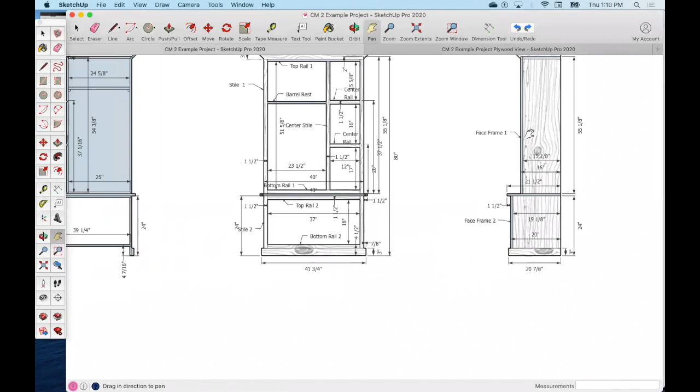We are going to start drawing our plywood view for our project plan. I have the project plans open in one document, and I'm going to draw in a second document so I can toggle back and forth. I made a copy of the same file and just added plywood view to the end. If you zoom out, everything is still drawn in here, I've just moved it over to the side for a fresh start. You could screenshot or do a variety of things to have your different views so you can see them.

For the plywood view, we're specifically going to need the side view and the back view to get started. So we're going to start by drawing the biggest pieces first, which is probably going to be your sides and your tops.

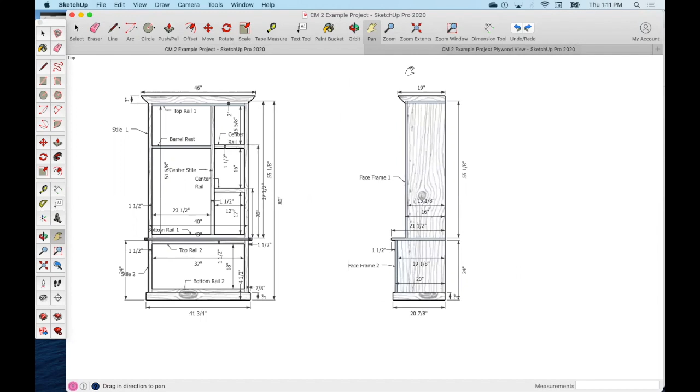If I zoom in for a closer look, I'm going to have two pieces at 24 inches by 19 1/8, and two pieces at 55 1/8 by 15 1/8. I'm going to lay those out first because those are probably some of my bigger pieces compared to our shelves and things like that.

So let's come back over here. I'm going to start by drawing a box that's 96 inches long, because that's the length of plywood, and 48 inches tall, 48 by 96. Now sometimes materials might come in a little oversized, like 96.5 or 48.5, but just for the purpose of laying this out, let's just draw a nice 48 by 96.

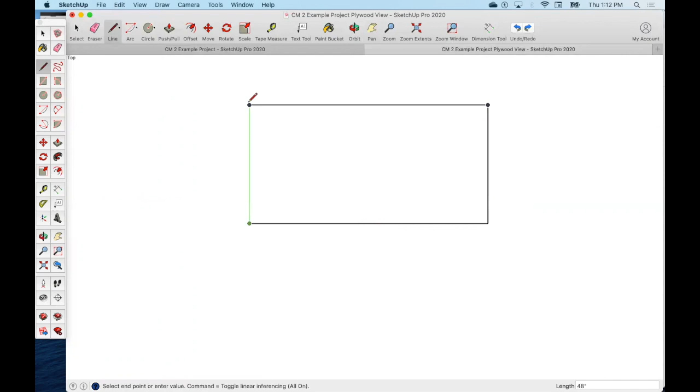You may want to dimension it so when you're looking at it, you can see how big everything is. You could dimension it afterwards as well.

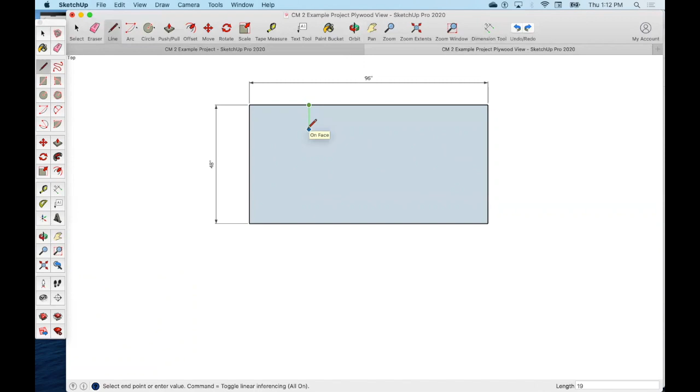So I'm going to start in the corner here, right on the edge, and come up 24 inches by 19 1/8 -- so I'll come up 24, and 19.125. Remember when you're typing in your numbers, you can see that size down here on the bottom, so make sure you get your pieces all nice and even.

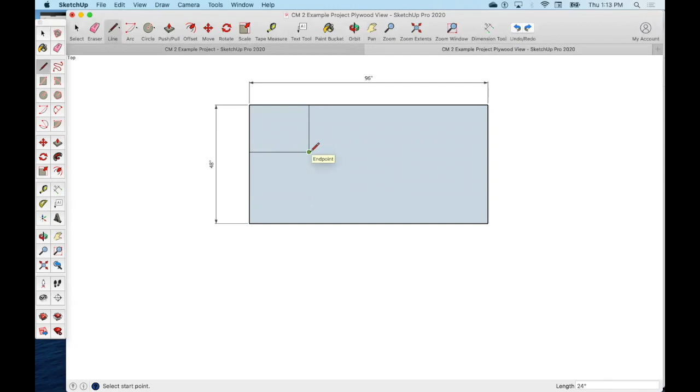Now, instead of like cabinet making one where we just drew our pieces right next to each other with a little waste space at the end, because we're going to cut this out on the CNC router this year for cabinet making 2, we're going to leave a 1/4 inch in between each one. So it might be a little more work laying this out.

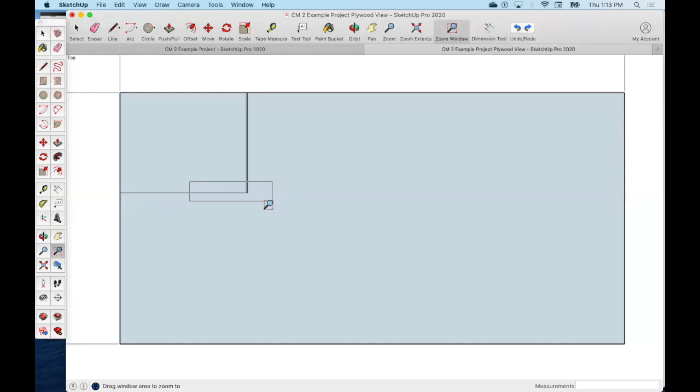We're going to come up 0.25, and then from that line I'm going to come over to the edge. Now I'm going to zoom in here and delete this line -- this is just some spacing, so when I bring it into the CNC router my pieces aren't locked together, and this leaves room for the bit to go around the outside of the pieces.

So now I'm going to come up my 24 and back over -- there's my two bottom sides. Let's take a look at the top, which was 55 1/8 by 15 1/8.

I'm going to come over a 1/4 inch again, 0.25, and find that line, and come up 55 and 1/8. So I'll take my pencil on that second node and come up 55.125, then bring that over 15 and 1 divided by 8, enter, and draw that back down. So this is my top piece, my top side.

Let's see what we have also for spacing over here. I don't know that we're going to have quite enough spacing for the other piece, so we could lay this out a little different rather than putting these two on top of each other, because that's going to leave us limited space up top -- we're not going to really have enough room for everything else.

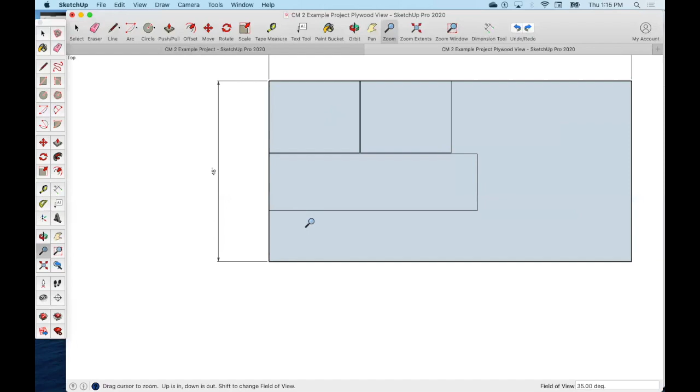Maybe we put these two right next to each other. That's all really going to depend on how you want to draw this, but we're trying to make it as efficient as possible.

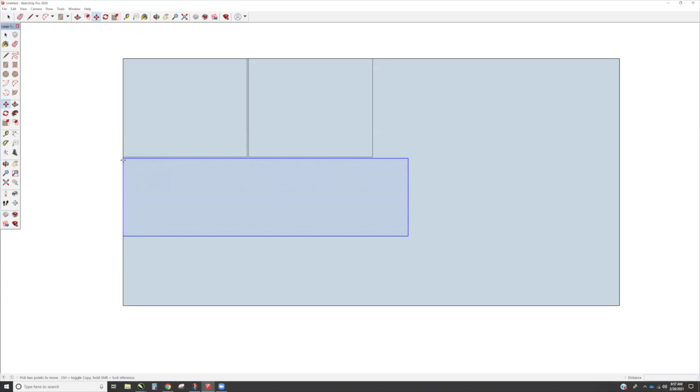So I've got this whole thing turned blue, and I'm going to move this. My lines aren't touching each other, so when I move this, I'm going to start moving it. On a Mac, you're going to hit Option. On a PC, if I have that highlighted and use the 4-arrow move tool, I'm going to grab it and start to move it and hit Control, and Control will make a copy and release it so I can move it to where I want.

That way I have my size correct, and then I can come over here and erase this line and this line and this line. I don't need those. So maybe when I do this one again, let's zoom in a little bit so we can get some better control.

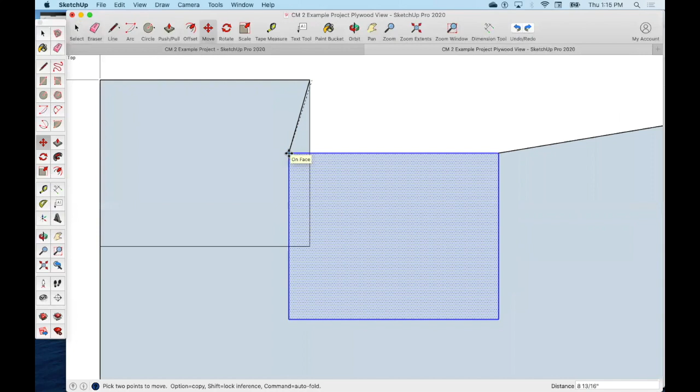When I do this one, I've got this blue, and I'm going to grab the 4-arrow move tool. I'm going to pick this corner, hold Option, and come down here, hopefully to that second node. Is it going to be there, that 1/4 inch? I'm not seeing it, so I might have to come down a 1/4 inch first. So I'm going to come down 0.25, and now I have that second node.

Now I'm going to use my move tool and the Option button to release that. That's what I'm going to do instead, and then come in here and erase this. Now I'm going to use that line, that 1/4 inch, as my bottom for my next piece. Let's see if it didn't snap either. So let's go up 0.25, and now I have that node.

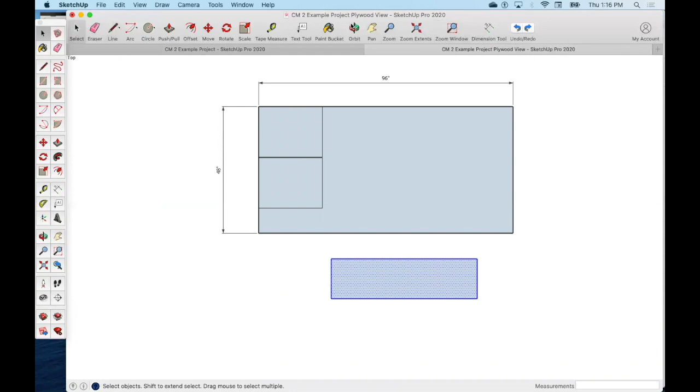So now I'm going to come back in here and move this piece. If I double click it or triple click it, I can grab the 4-arrow move tool. I'm going to move it up to that first node, so there should be 2 nodes there. I should now have that 1/4 inch still drawn in there. It's there.

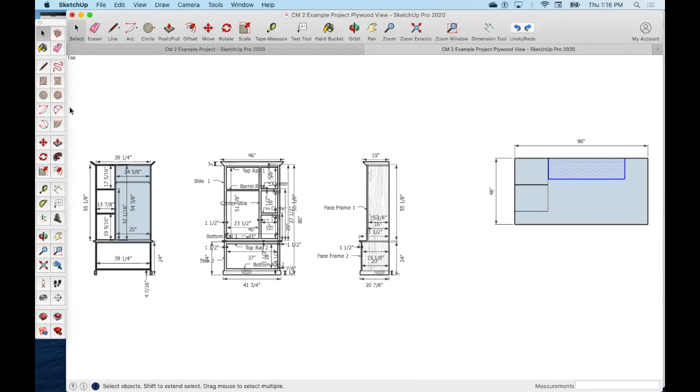Actually, for the convenience of hitting zoom extent, I don't want to see this all the time, so I'm just going to draw my plywood so that every time I hit zoom extent, it shows me my plywood when I zoom into something. You're welcome to leave that. Again, I have my original over here - I have not messed with that.

What I'm going to do now is I need 2 of these, one for each side. So I could copy and paste, or I could use that move tool again. I'm going to take my pencil tool, come right here, and come down 0.25 again. That way it gives me a little bit of clearance for when I bring it over.

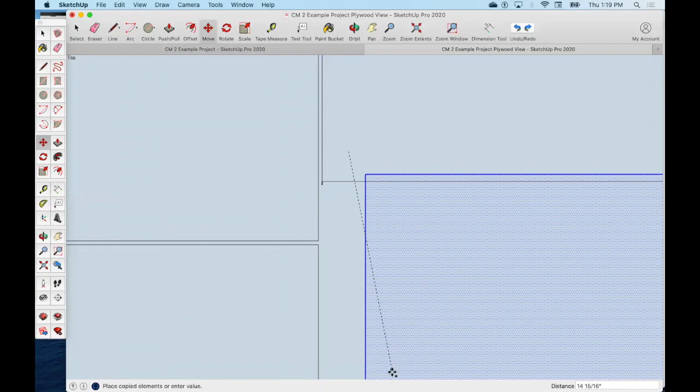I'm going to triple click this and start to move it from this corner here, and hit the Option button again - Option works on the Mac. I don't know that got stuck where I wanted it to, so I'm going to undo that. I'm going to grab this again, move it, and Option. Make sure I don't overlap that. That's good, and take that node to that line right there.

Okay, we will have to come back eventually and delete these little lines that I drew for my 1/4 inch reference. It's up to you if you want to do it now or later - not a big deal. So now by moving these down here, I have room for a 3rd piece up here.

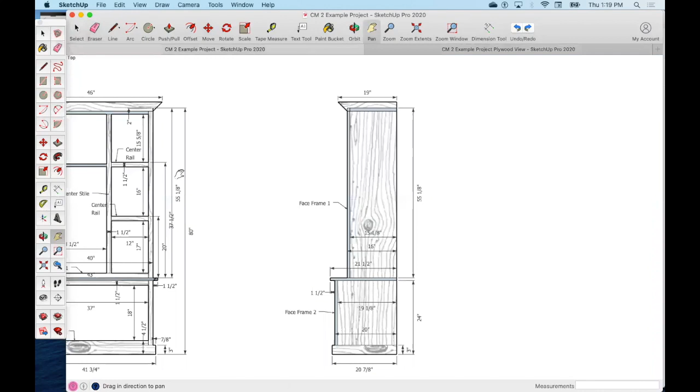I'm going to need that 3rd piece right here where this divider is. That's going to be the same depth as this, 15 1/8. Actually, it'd be 3/4 of an inch less, because the backing is going to slide into here, and this middle piece is in the middle - it needs to be 3/4 of an inch shorter. So it would be 54 3/8 by 14 3/8.

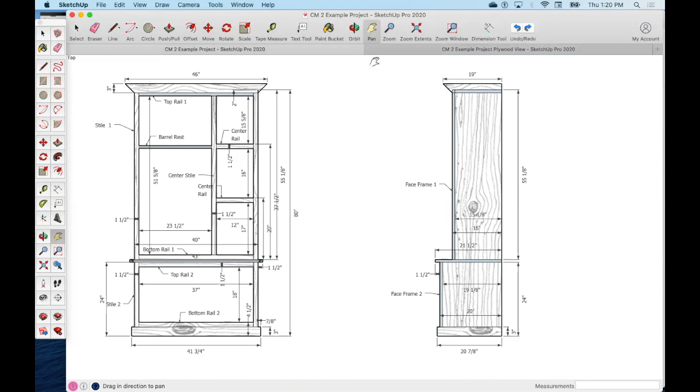So we're going to come back over here, and that was 14 3/8 by 54 3/8. So let's start drawing that one, and I'm going to come over a 1/4 inch.

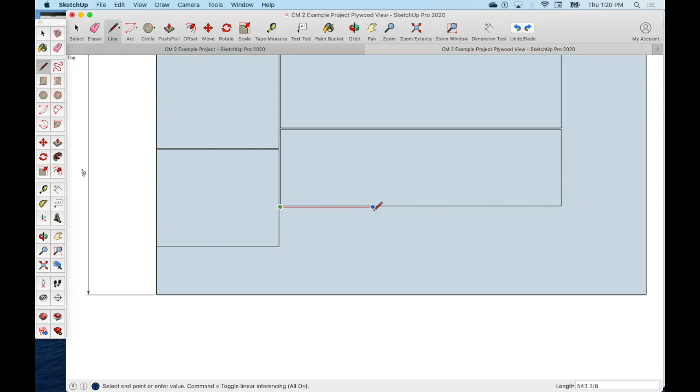Let me zoom in a little bit here so I can make sure I'm starting on the right point. That was 54 and 3/8 - well, I got way too many numbers in there. 54 space 3 divided by 8. And then I'm going to come down 14 space 3 divided by 8. And now I can complete that, 54 and 3/8, and draw that over.

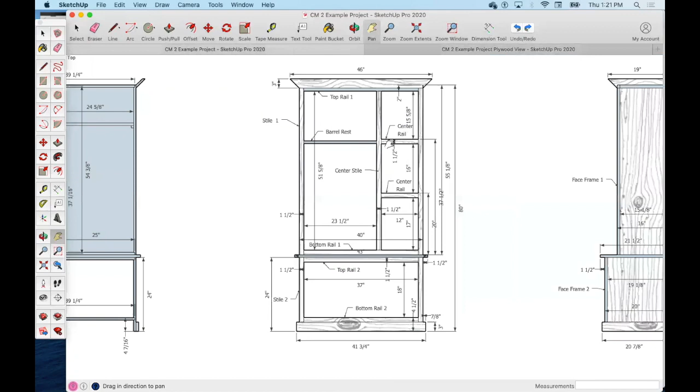So I have my 2 outside and my middle divider. Let's see how much material we have left here. We've got about 15 inches, and I don't think that's going to be enough for what we want to do with any of our other pieces. We might be able to use that for our 2 shelves, but let's move on. We're not going to be able to use any of the other bigger pieces.

So if we take a look at these, again, they're going to be 3/4 of an inch shorter. So that was 14 3/8 by 13 7/8. So the grain length is going to be the 13 7/8. And so we're going to come here.

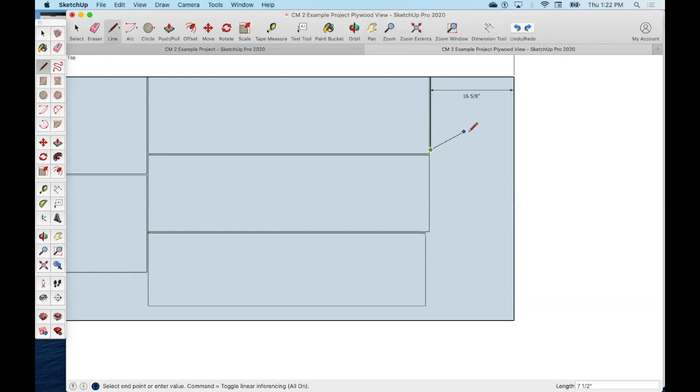I need a 1/4 inch, 0.25. I'm going to come down 14 space 3 divided by 8. And I'm going to come back up - what was it? 13 7/8. So come back up 13.875 and connect that over. So this is going to be one of my shelves.

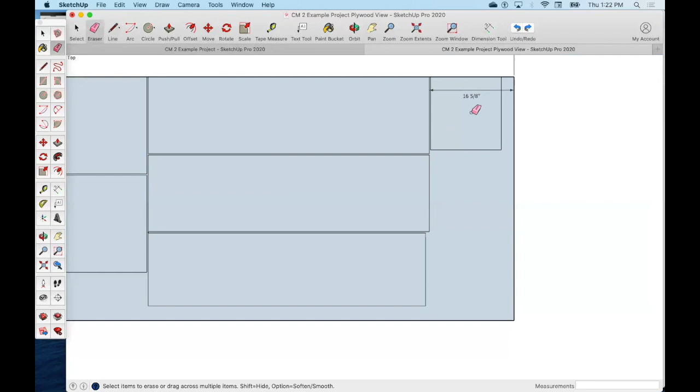And I can delete this dimension because it's really not meaning anything to us right now. And I need 2 of these. So what I can do is I can double click that again and use the 4 arrow move tool. And as you move, you can hit the option on a Mac and move that down.

Now, because we're not using a table saw to cut out our pieces, we can have these joints staggered because the router will just go and make the corners and everything will be nice and complete. We don't have to worry about these lining up exactly. So as long as we have that 1/4 inch gap in there, at least a 1/4 inch minimum, then we'll be good. So I've got those 2 pieces in there.

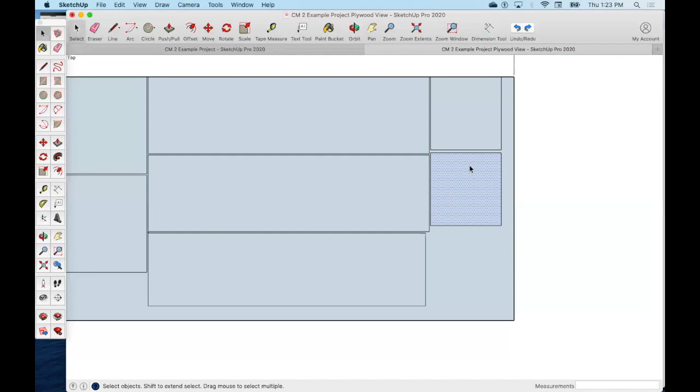I'm going to need another sheet. So I'm going to just come up here a little bit and I'm going to draw my second sheet at 48 by 96. And if I hover over this dot and drag it up, I haven't clicked - you can see I'm on a green line there. And if I click now that I have that green line, it means I'm lined up with that node.

And I can have my 2 sheets lined up. If that is a concern for you, it might just make things easier when you're zooming in and out. And I'm going to come up 48, and I needed to connect those 2. So this is going to be my sheet, second sheet - sheet 1 or sheet 2, however you want to label them or distinguish them apart.

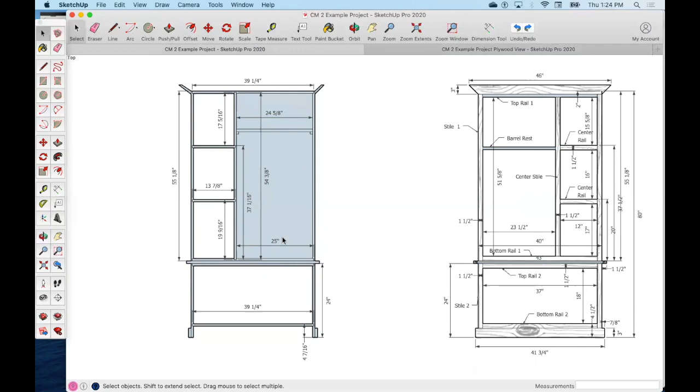So now what I need is a top, a bottom of the top, I need a top of the bottom, and I need a bottom of the bottom. So they're going to be different sizes, but the lengths are all going to be the same. That 39 1/4 is how long they are. So 39 1/4 by 2 of them at 19 1/8, and then that 39 1/4 by 2 of them at 15 1/8.

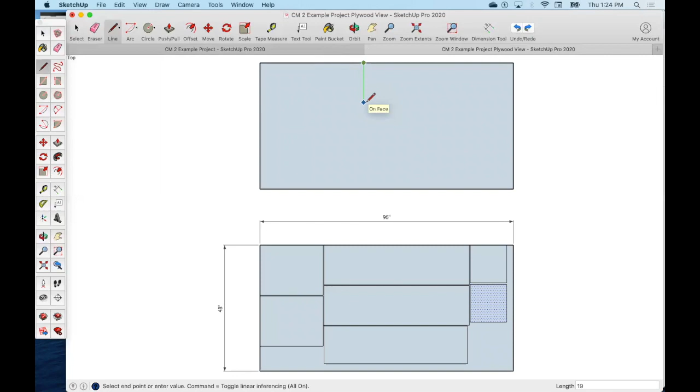So I'm going to start with my big ones again. My biggest ones would be the bottom. They're 39 1/4. And I find the end point and I'm going to come down 19 1/8 and draw that back. So there's one of them.

And then I'm going to come up from this corner, 19.125. And I'm going to draw this over 39 1/4.

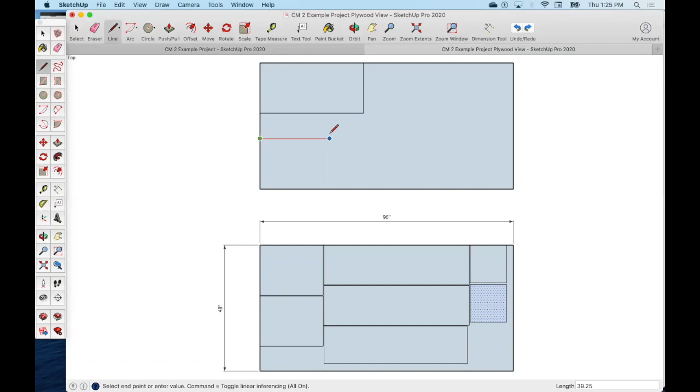So there's my 2 pieces for my bottom piece. That is for this cabinet down here, the shelf and the top of this cabinet down here. Now I need 2 more, one for up here and one for down here, again 39 and 39 1/4 by 15 1/8.

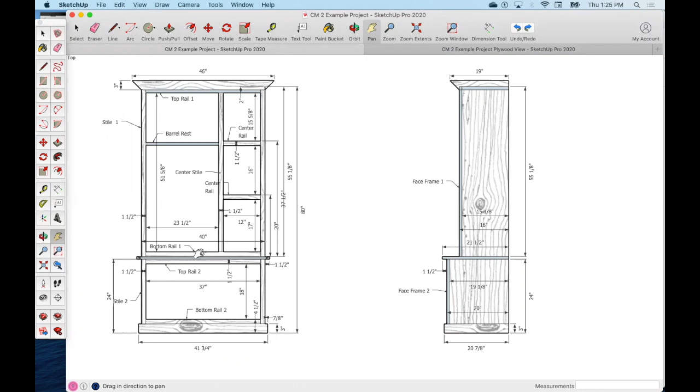Let's make sure we're leaving that 1/4 inch groove for the router. I'm going to come up 0.25, find that node, and come down 15 and 0.125, 15 1/8, and that was 39.25, 39 1/4. I'm going to come back.

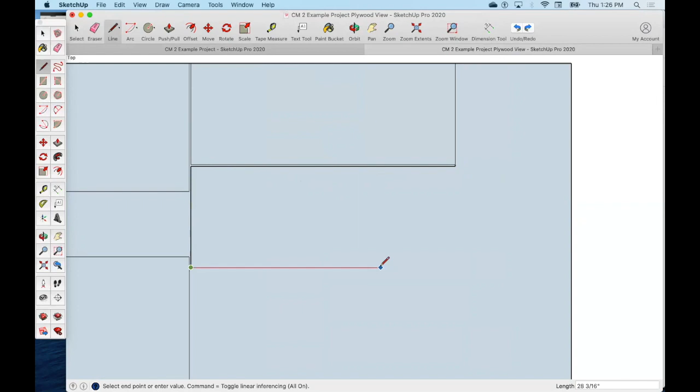I'm going to come over again 1/8 or 1/4 to give myself some room for the router. And then that doesn't look right. There we go. And then from that point I'm going to come back down 39.25 and over 15.125, and I've got to connect the dots, 39 1/4.

And there. So I'm going to zoom in and erase this little connecting line that gave me my 1/4 inch groove or depth between there. So there are my 2 pieces.

I put my scrap here in the middle. That way I didn't have to come over a 1/4 inch. You could butt those right together if you wanted. In reality it's probably going to be scrap material here, not going to be good for much.

If you're doing drawers, one of our examples had drawers, which we're going to put on here for an example, we could probably put some of our drawer pieces right in here and use the maximum amount of material.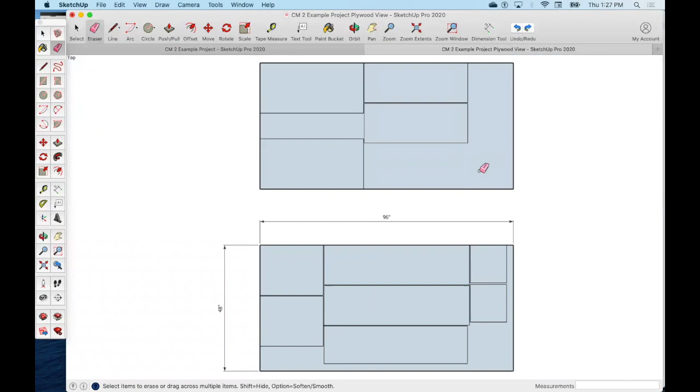So let's take a look at our drawer parameters. I've got my plans here with my sizes. I'm going to need two pieces that are 36 inches long and two pieces that are 17 and a quarter inches long. Now how tall or wide they are going to be on this project is going to be based off the front view.

So if we come to the front view, our opening minus an inch. If our opening is 18, that's divided in two, that's 9. Then we're going to take an inch off that, so we'll make these 8 inches tall, by the length of 17 and a quarter and 36.

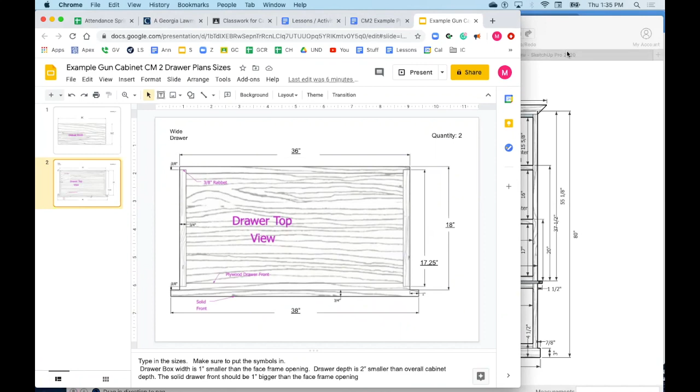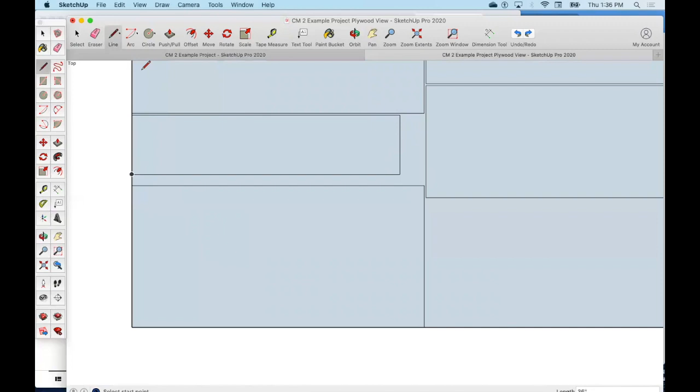So again I'm going to try to start laying out my biggest pieces first and see if my 36-inch piece will fit here. If I zoom in, I'm going to take my pencil and come down a quarter inch, 0.25, and then come out 36 inches, and that was 8 inches tall, and that's going to fit nicely in there. And then I need 2 more.

I have 2 drawers, so I'm going to do several more of these because I need one for the front, one for the back, one for the front, one for the back for 2 different drawers. So let's come in here and come down a quarter inch, 0.25, and do the same thing, 36 inches and 8 inches.

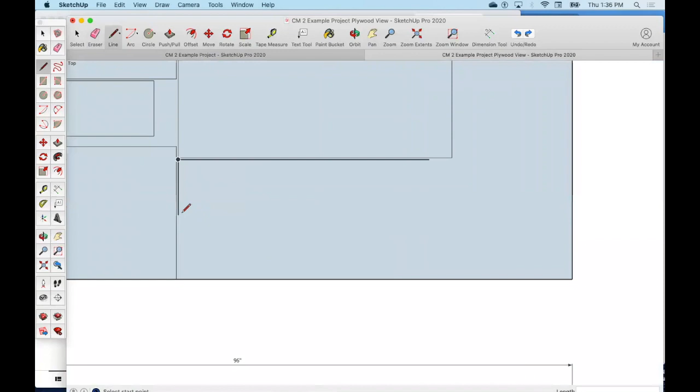And while I'm here, since I have those lines drawn, I'm going to delete this little connecting point and zoom back in here at 36, and connect the dot. Then I'm going to come over a quarter inch again, 0.25, and then down.

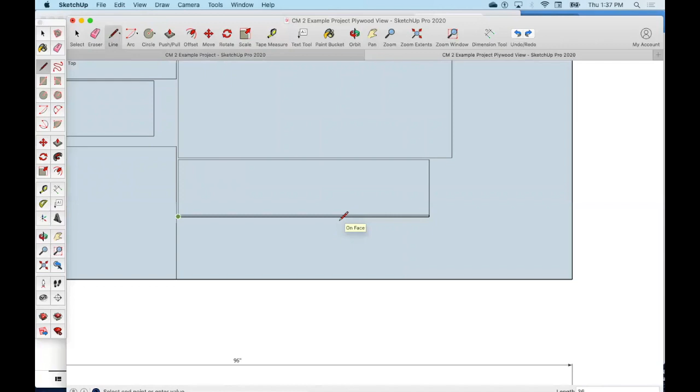39. Whoops, 36 is my number. I've got to keep it straight. So down 36 and back over 8 and back 36 and connect the dots. And again I need to come in and delete that little spot there.

All right, so I should have enough room to get the rest of my small pieces of my drawer, but I'm going to be short one piece. So I could run it the wrong direction up here and maybe use that towards the back of one of the drawers. That's probably what I would recommend at this time, because rather than buying a whole other piece of plywood that you might not need the rest of, we would put it right here.

We'd have one piece going the wrong way. We'd put that at the back of the drawer instead of the front of the drawer. So if we come in here and go the other direction, I'm going to start right on the edge. I'm going to come up 8 inches and come back 36 and down. Now I did use up a lot of my other space, but hopefully we can get some pieces right here.

And I think it was 17 and a quarter by 8 again. So I'm going to come out a quarter inch, 0.25, and come over 8.

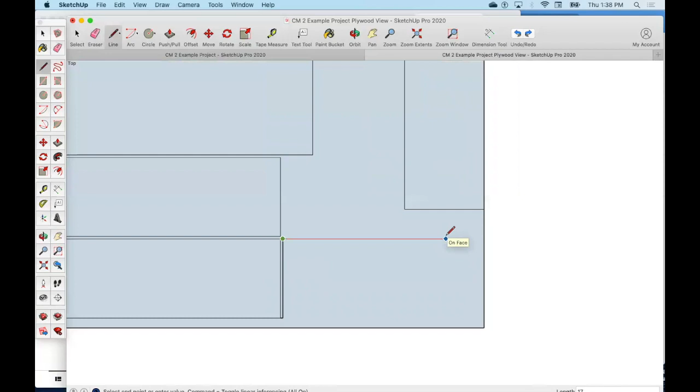Get there straight to 8, and that was 17 and a quarter, and 8. I'm just filling in all my pieces here so I can fit everything I need.

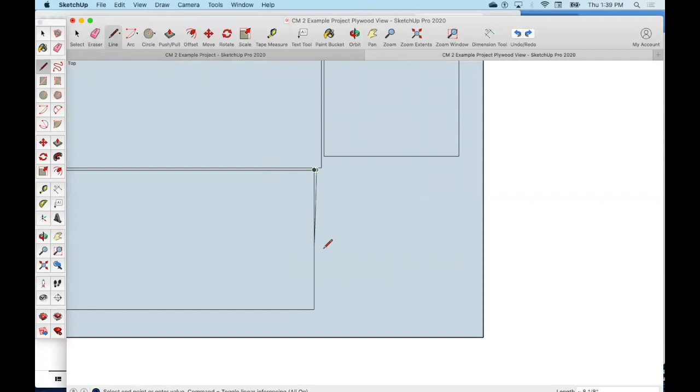So I got 1, I still need 3 more. Let's see what we can fit on this one. Again, we want to come up a quarter inch, 0.25, and then from that point I'm going to come over 8, and up 17.25. Ooh, that's going to put us right over the edge, so that's not going to work there.

So what we may have to do is take this piece and either find it out of a scrap board or buy a quarter sheet of plywood if you can't fit it all on. Typically we only sell halves or full sheets, because we get a whole bunch of little tiny pieces left over if we do smaller than that.

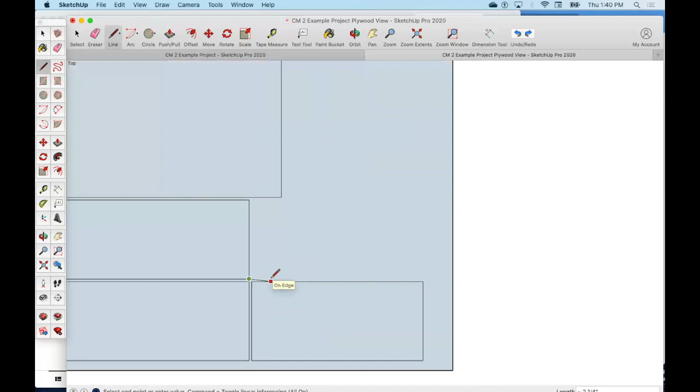So right now I think I'm going to take this one off and see what I can fit otherwise on here for those 17 and a quarters. If we can fit the majority of them on here, that's just a little bit less we'd have to buy. So I'm going to come up 0.25 and over 8, keep that pencil straight, and 17.25, 8 and down, and erase this little marker.

Okay, so there's 2 there. Again, I don't know that we're going to quite fit what we want right up here. Let's see where we are. 17 1/4 exactly, so that's unfortunately not going to be enough room because we have to leave room for the cutter to go around. So you could either narrow your drawer up and not have it as deep if you wanted.

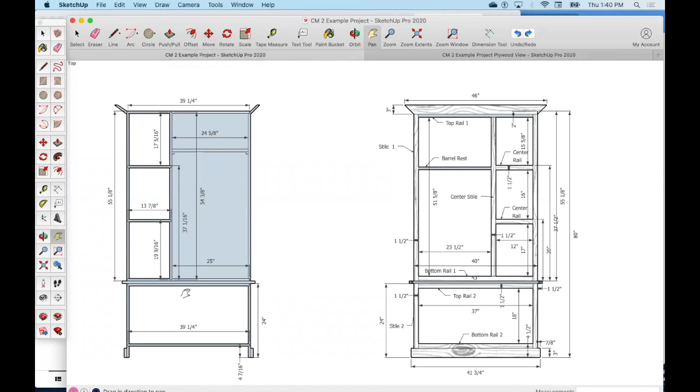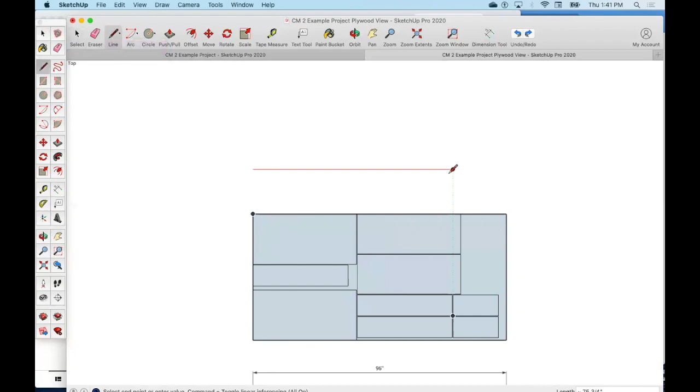You could divide your drawer openings into 2. You could put a stile in here, but then you're going to need another divider to support the drawer pieces. So at this time we would have to draw a 3rd sheet and see how much of that 3rd sheet we're going to use. So let's scroll up, and we're going to come up a little bit from this one. I'm going to go 96, 48.

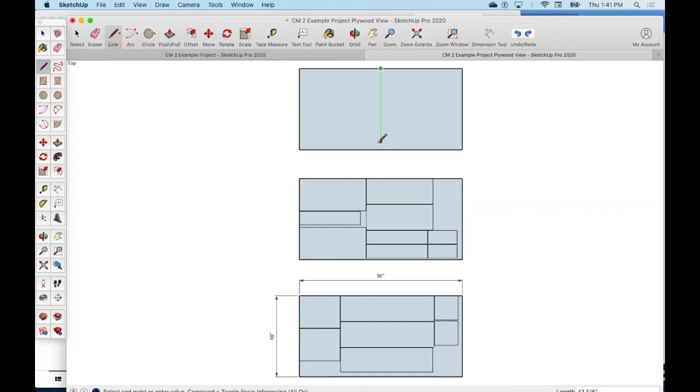Okay, so I'm going to really try to be on less than half a sheet. I'm going to come out 48, and I'm going to just draw a line down here. I'm hoping not to use that other half. So I'm going to zoom in so I can see this half a little bit better, and finish drawing my pieces.

So that was up 36 inches, and down 48, down 8, and connect that dot. So there's my last side I needed. So I have 1, 2, 3, 4, and then I need 2 more of these 17 1/4.

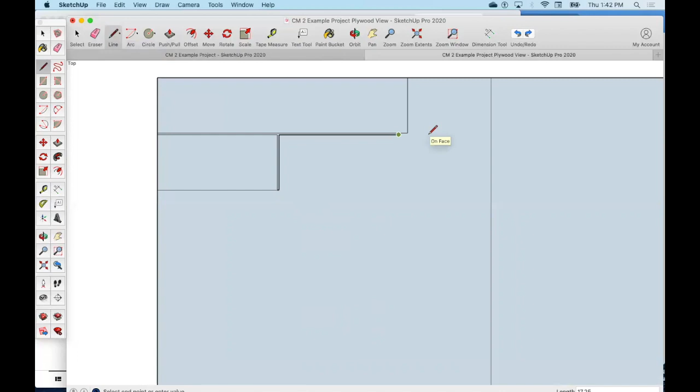So I'm going to put them right next to here with a spacing again, 1/4 inch. Then I'm going to come up 17.25 and down 8. Then come up 1/4 inch from there, 0.25, and come over 8 inches. There we go. And up 17 1/4, and back 8. So there are the 2 pieces.

There are the 3 pieces we are missing. Now you could, with a classmate in the shop, maybe they also need just a little bit extra, and you could go in with them and negotiate how you want to split this piece. I really don't care how you guys split it, as long as the entire sheet is accounted for, or half a sheet, whatever you guys are working with.

I need to be able to have every piece of wood logged in the shop. So if you're taking 1/4 of a sheet and your partner's taking the other 1/4 of a sheet, then that'd be fine. We just need to log that in the logbook appropriately.